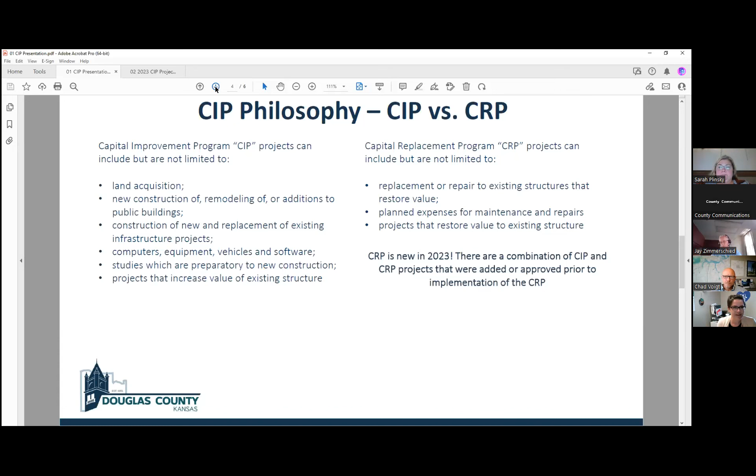As we were looking at the CIP this year, there were a couple of projects that we've had in the CIP for a couple of years, and at least for the past year, they've sat idle.

The Douglas County Correctional Facility Space Reallocation Project — that project we were able to determine was well outside of the scope of our capital improvement program. It looks like that project may cost upwards of around $18 million to complete.

So in the proposed CIP, you will see a redistribution of funds to both projects in the CIP and the CRP. That is one of the projects that has provided a significant influx of funding available for other projects should we reallocate that funding.

And Brooke, if I can interject there a little bit, Sheriff Armbruster is also available if there are questions later by the commission.

I think we haven't closed the loop on this conversation with the county commission yet in terms of the initial work the sheriff's office did with Treanor Architects to determine what some reuse of space would cost.

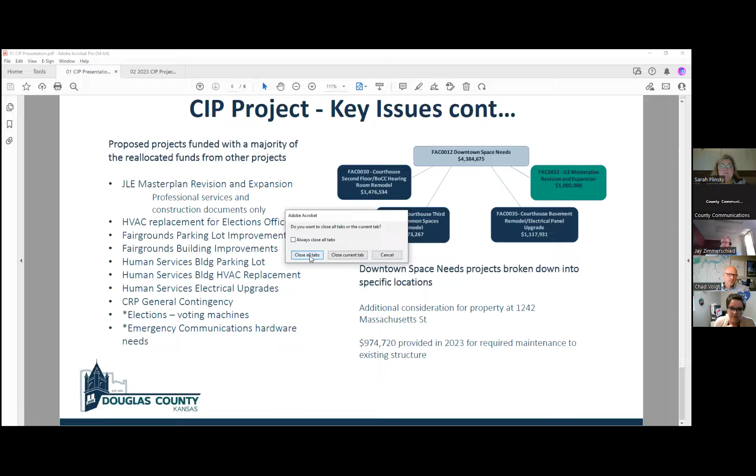If I may, I'm going to pull up the individual project pages and quickly walk the commission through them, being mindful of time since I want to share with our colleagues over at Public Works. Bear with me here. Sorry, guys, I closed it. Okay, almost there, thank you for your patience. All right, so this is very, very small.

I'm not going to get into the summary a whole lot, since everything on this page is on the individual project pages, so I'll just go through that. This table is an allocation summary by year of expected expenditures, and it shows all the project allocations by year, also including 2022, so we're also looking at what we did this year too. Let me make this a little bigger for everybody. Is that good? Okay.

This first project is a long running project, I think it started in 2017. This is our yearly payment on the bond issue for the fire station at 745 Kentucky Street - I may have gotten that address wrong - but we typically pay about $100,000 a year. As of 2022, approximately $1.04 million in debt remains as the county's portion, scheduled to be exhausted in 2033. That debt will be relieved and we can free up an additional $100,000 each year for that. There is no allocation in 2023.

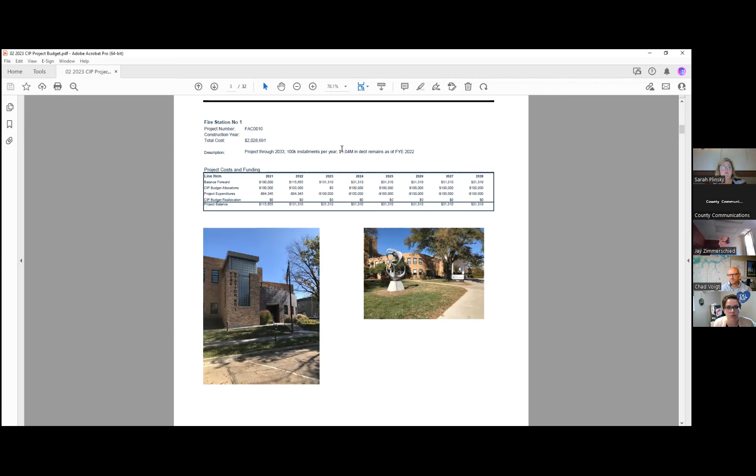That is because a few years back, there was an extra $100,000 on there, and just in case we were able to pay that off early, the thought was that we could just save that and set it aside, but we'll just have to keep paying the payments each year.

The next project, this is that reallocated project. I indicate here which projects they were reallocated to. We saw that in the chart that I broke down on the presentation slide.

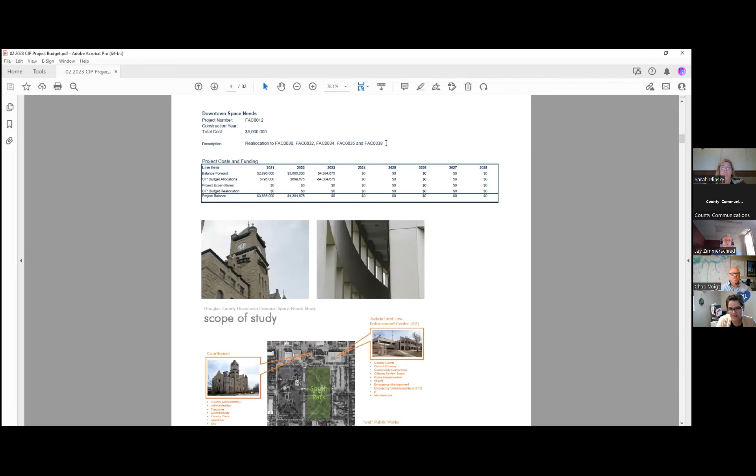And then the courthouse stonework restoration. This project is slated to be completed in 2023, so work has already begun. This is the basement waterproofing and also the above-grade restoration to the courthouse stonework. Once we really get that waterproofed on the exterior for the above grade, we can really focus in on getting some of the common spaces inside the courthouse and offices renovated, since we won't have water coming in.

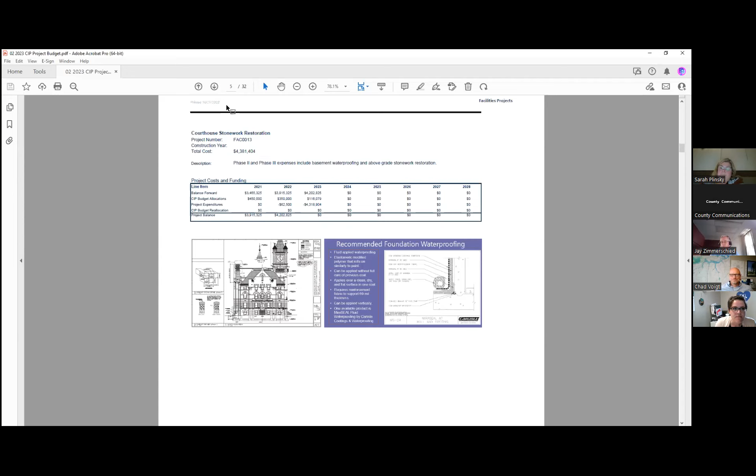The next project is the Fairgrounds Improvement Project. Maintenance staff has made significant headway on getting contractors out to the fairgrounds to make improvements to that property. They're just now completing the roofing project at the community building. That work is underway right now, and it should be complete in early 2023.

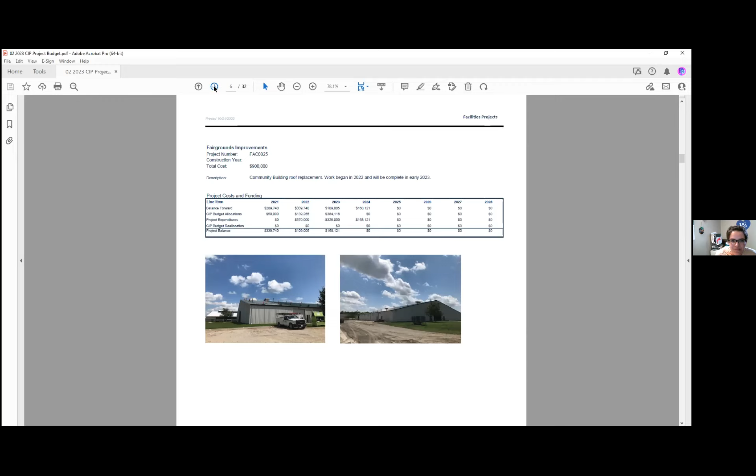The Douglas County Correctional Facility Space Reallocation Project - this is the project that we did, in fact, in the proposed CIP, reallocate to other CIP or CRP projects. I do want to note that in out years 2027 and 2028, the proposal is to put some additional money towards that so that we can start looking at that project again.

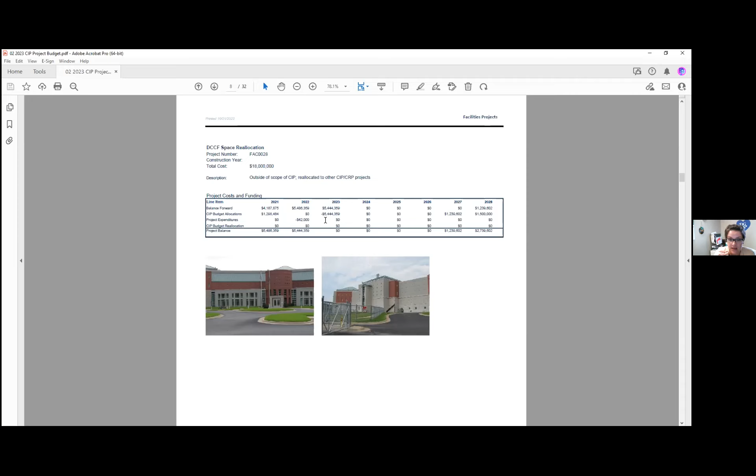The first floor clerk's office remodel, this project is slated to be completed by the end of the year. Originally, when we had looked at this project, it was split between an equipment reserve fund and the capital improvement fund. I just want to point out that in 2023, with the additional funding available through reallocation of funds from those other projects, I did include the other half to reimburse that equipment reserve fund in 2023. I just want to point that out because that is a little bit different than what was originally brought to the commission when we talked about this project.

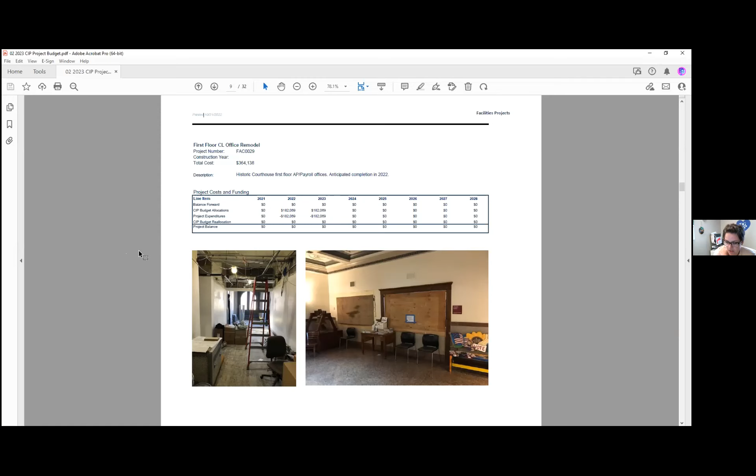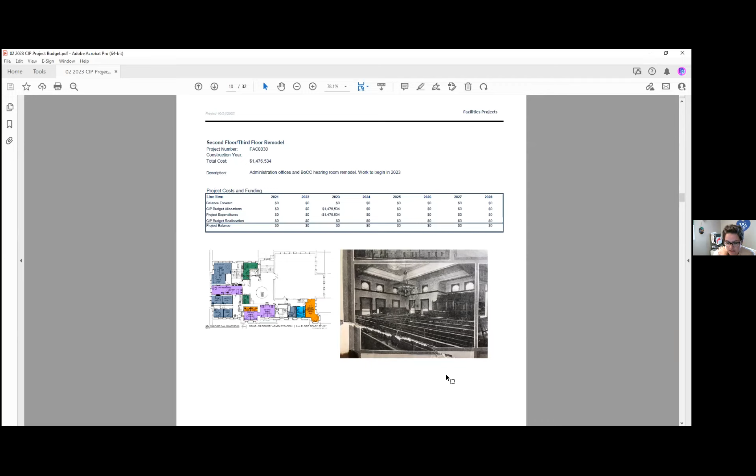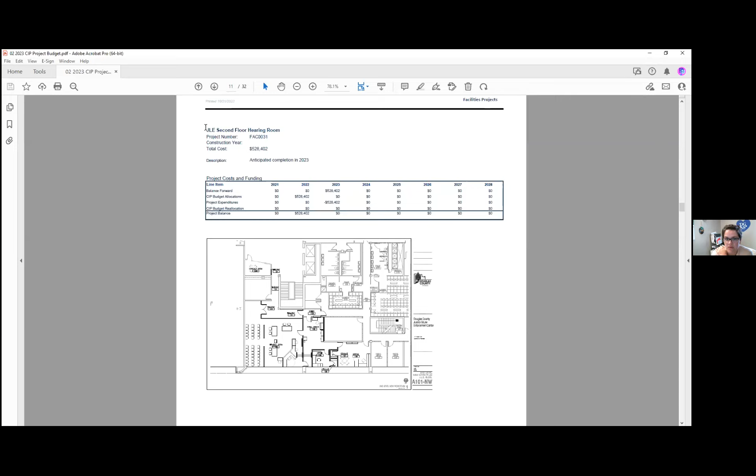And the second floor hearing room in the JLE, this is a project that was approved this year and work is getting ready to start. I don't know if we'll pay any out this year, so I put the remaining payout for that project next year.

JLE master plan revision and expansion. I'm not going to spend a whole lot of time here because I think I covered it pretty well in the presentation that we went over earlier. But if commission has any questions about that, I'd be happy to answer that.

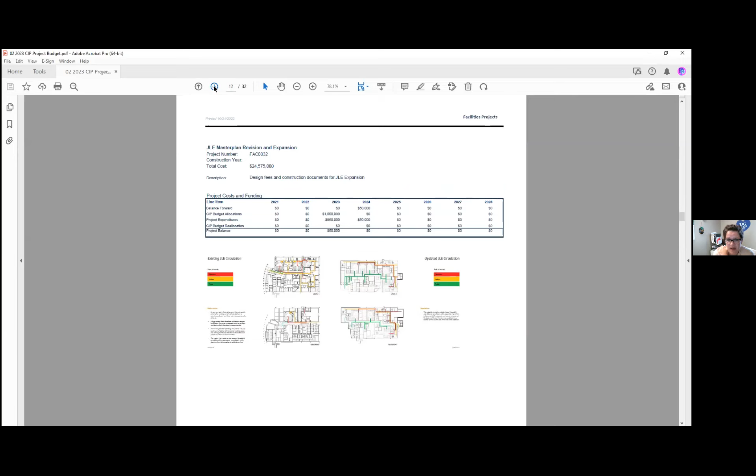Courthouse third floor remodel of the common spaces. This is going to be the Register of Deeds office and then just general common spaces, hallways, bathrooms, repairing some of the paint and plaster where water is coming in on the west side and the north side.

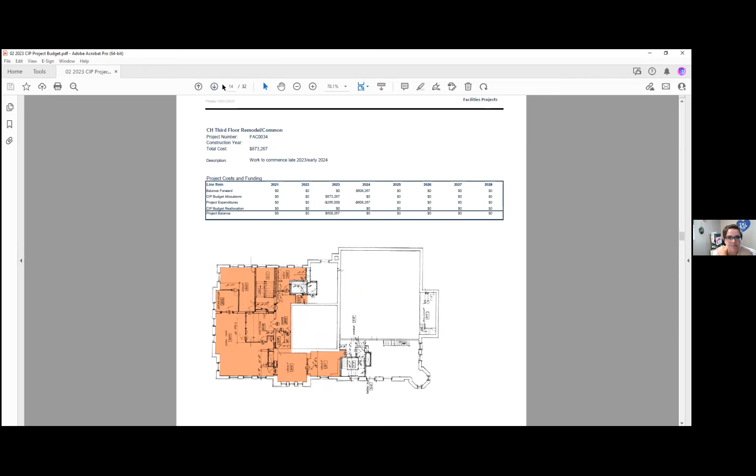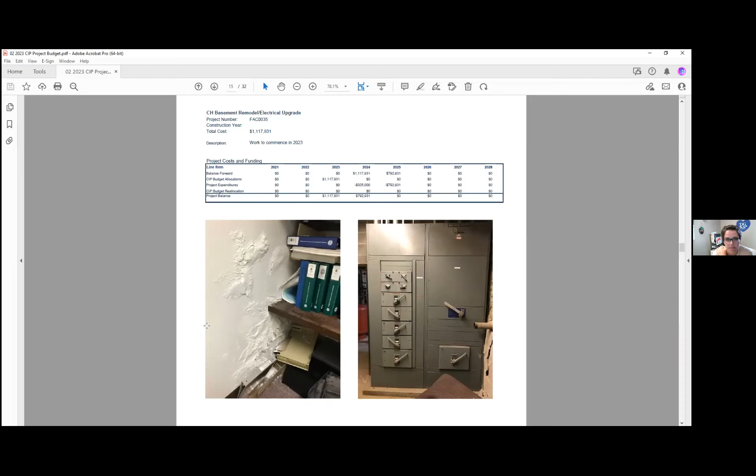Courthouse basement remodel and electrical upgrade. We talked a little bit about this, but again, looking at the walls downstairs, once we get that basement waterproofed, it is going to be really important to make sure that we get in there, repair those walls, paint them, and get them up to how they should be.

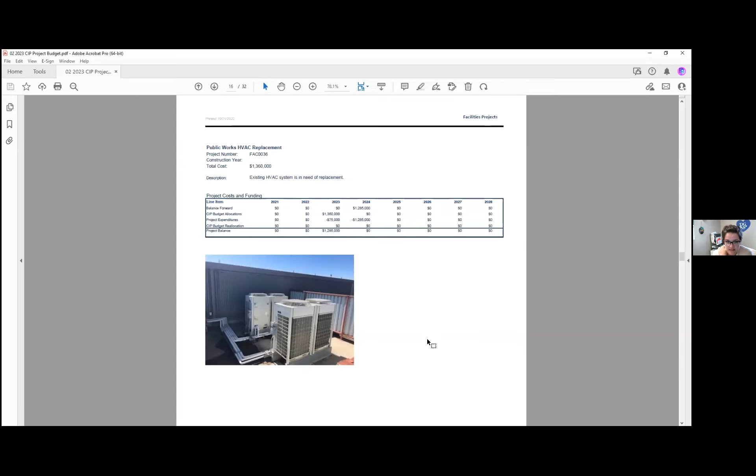Public Works HVAC replacement. This is a project that needs to be completed. I would defer to my colleagues that have a little more technical knowledge than I do if commission has specific questions about this project, but the existing HVAC system at Public Works is in need of replacement.

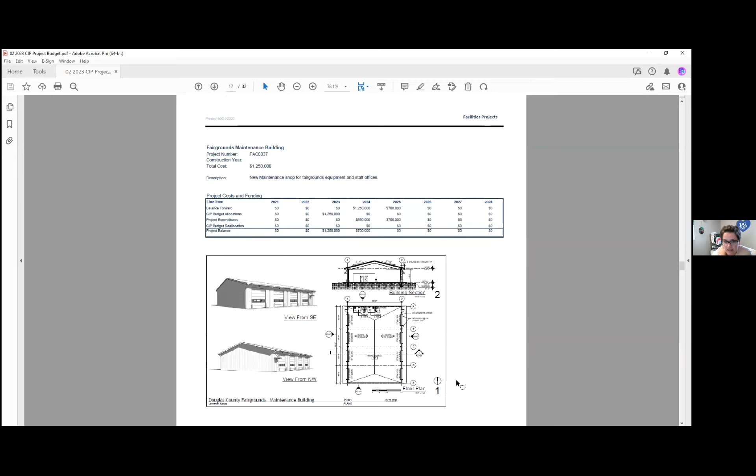Fairgrounds maintenance staff also needs a building, a new shop for the fairgrounds equipment and staff offices. The illustration depicts how that building would be set up, and these funds are allocated in 2023, with project beginning in 2024 and 2025 in the proposed CIP.

1242 Massachusetts improvements. I spoke a little about this already, so I won't spend a lot of time here. But this project could be ongoing for a number of years as we repair what needs repaired now, and then move forward into renovating that building for office space and making improvements at that location.

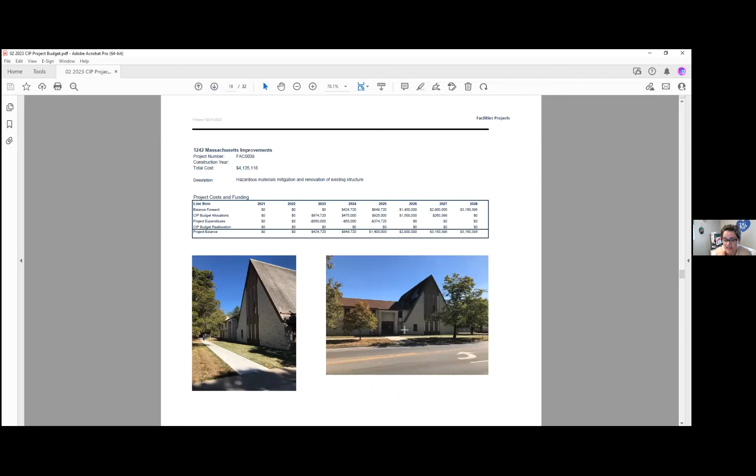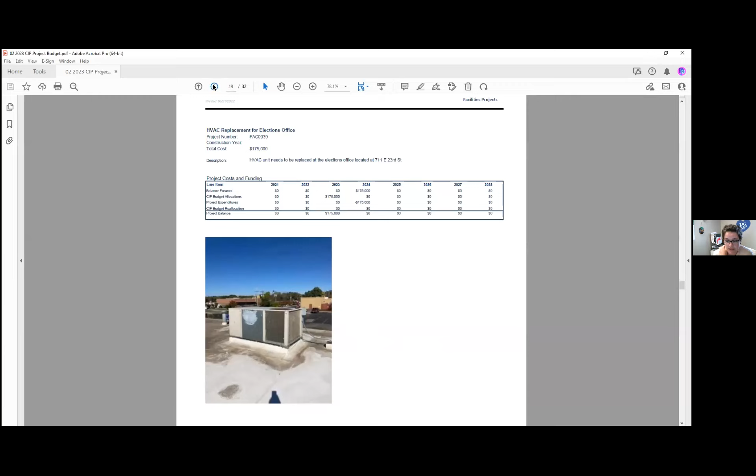HVAC replacement for the elections office. The HVAC unit does need to be replaced there. It's aged and it could potentially fail. I would defer to any of my colleagues that have more technical knowledge to answer questions.

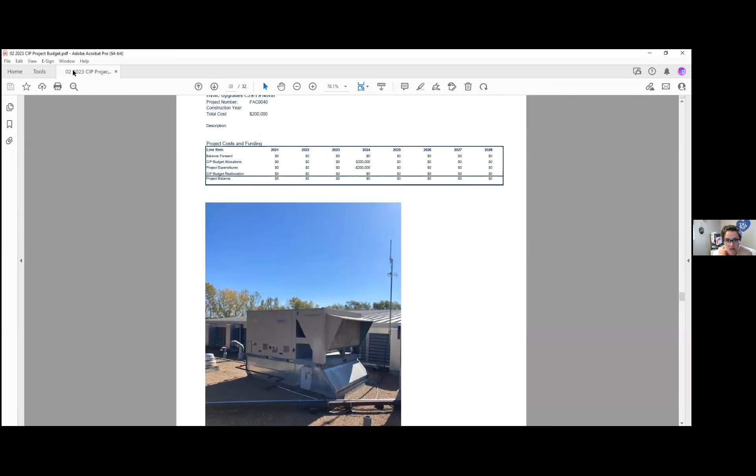HVAC upgrades to the youth services building. This is the building at 330 Northeast Industrial Lane. This project is slated for 2024 and is in need of upgrade.

HVAC upgrades to the JLE and historic courthouse. This project is slated for 2024.

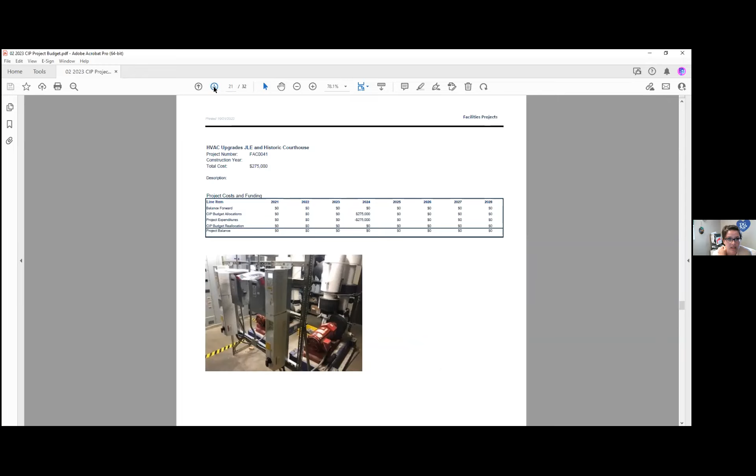General contingency is available for both CIP and CRP. These funds are available for things that come up throughout the year. I know we've had a couple of things this year, the elevator, the first floor remodel. We'd like to have sufficient funds available for projects that come up unanticipated, so we have funding to get things done quickly, should the need arise.

The fairgrounds parking lots are crumbling and need improvement. These projects are slated for 2024 and 2025, with allocations over 3 years beginning in 2023.

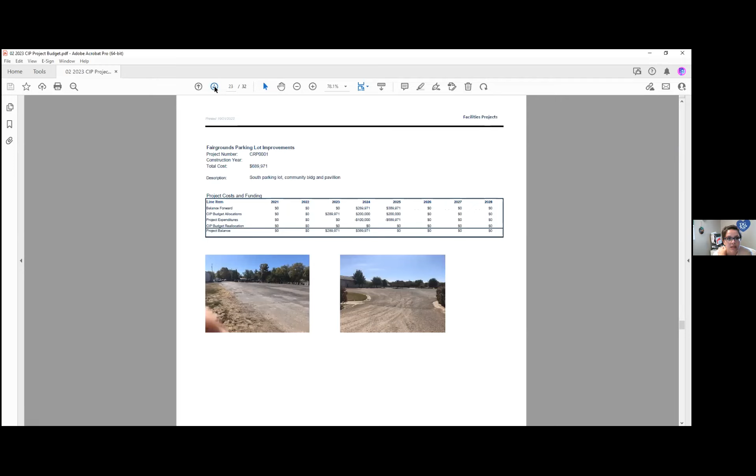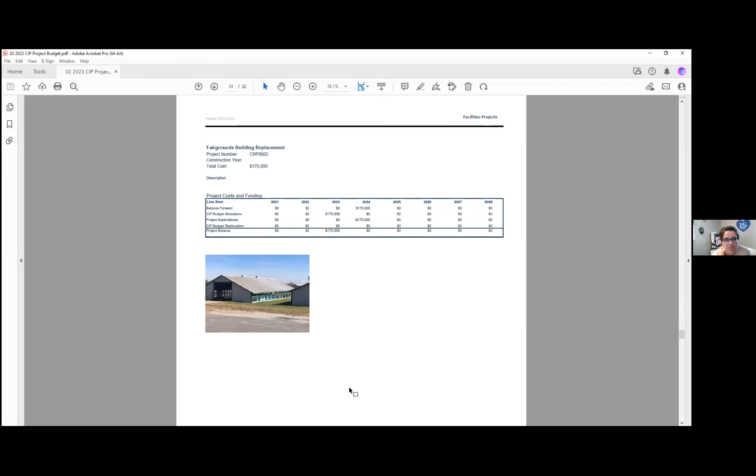Fairgrounds building replacement. This is slated for work to begin in 2024.

The Human Services building HVAC also is in need of replacement. The project is allocated in 2023, but I have it set to be completed in 2025.

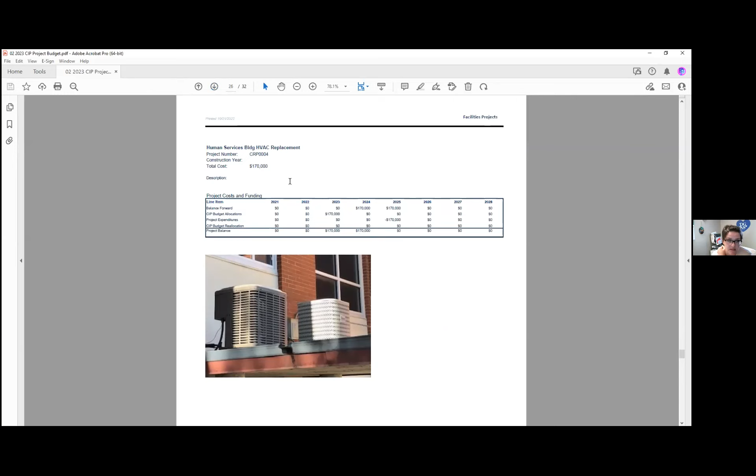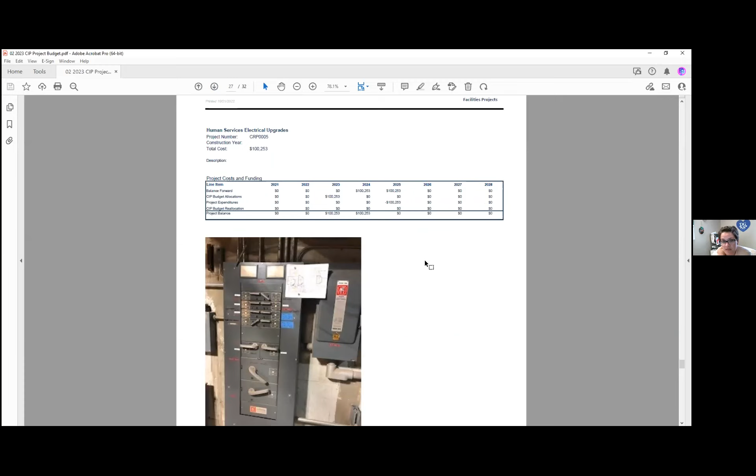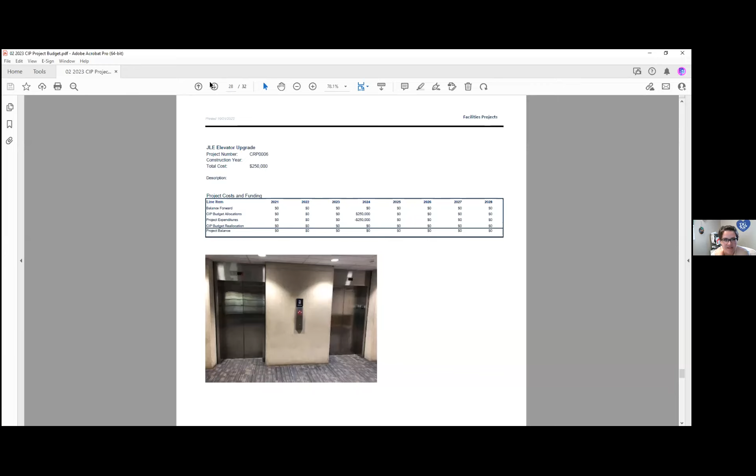The Justice and Law Enforcement Center is in need of an elevator upgrade. Similarly to the courthouse, it's aging, and we just want to get a leg up on that before any failure.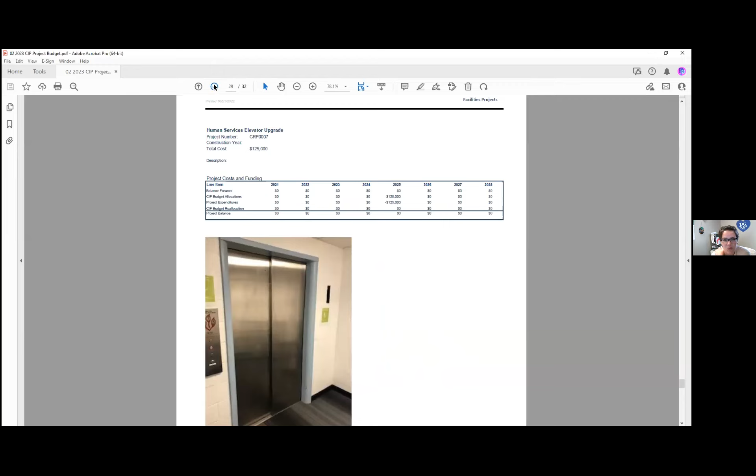We want to get this down now as a project that needs to be done. And then we have an HVAC replacement at the Fairgrounds Building 21 project, allocated and slated to begin in 2024.

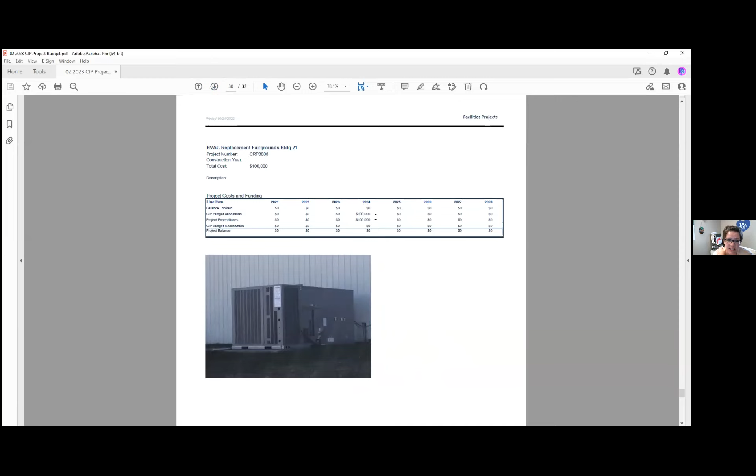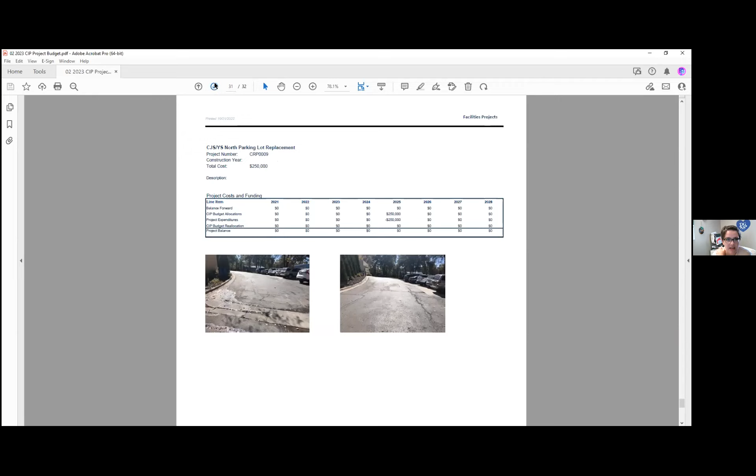Going back to youth services north, the parking lot is in need of replacement there. That project is allocated and slated for 2025.

Finally, like the capital improvement program allocation, there's also a contingency allocation for the capital repair program. This is vital. When a need arises, we have funding available as we approach commission about those issues that come up throughout the year that we haven't planned for.

That is all I have as the facilities side of the presentation. Chad, I'm right at 4:29. So if commissioners have any questions, I'd be happy to answer them now or at the end if Chad wants to begin too. It's up to you guys.

Why don't we pause for questions here on these first set of projects? I have a couple questions, but I want to open it up to Commissioner Willey first.

Well, you may have noticed I had some technical difficulties. I've been here the whole time, just maybe not visually. I've swapped to another computer from IT. I do have quite a few questions actually, and I had been looking for a time to sit down with Brooke to explore some of those in more depth, which I think would not be within this meeting, but more of a one-on-one, and give us a little time before we have this to vote on.

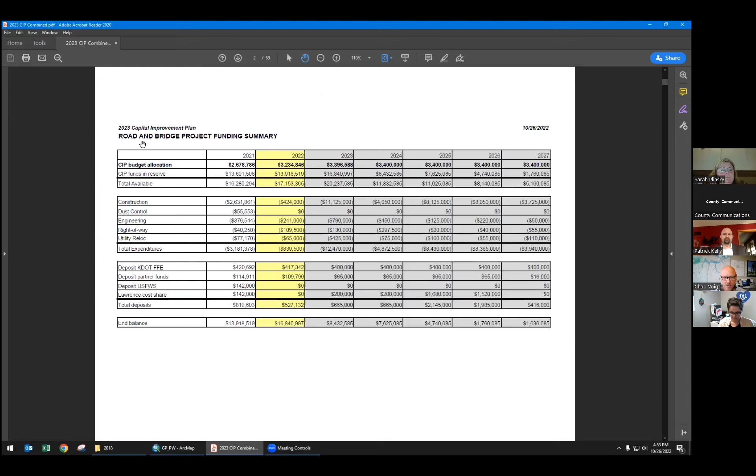This is our part of the capital improvement plan. This document will be the one that comes to you in the packet when we do go for approval of the CIP. So this is a complete and ready to go recommendation from us. This table here, I'm not going to cover. It's a format we've always done in the years I've been here, so I wanted to include that just as a point of reference. It's our cash flow and expenditures kind of in a big snapshot.

There's a benefit to being able to do this. We can respond to things like this year, when we had to reject bids and push projects back just based on the economy and the way things are panning out.

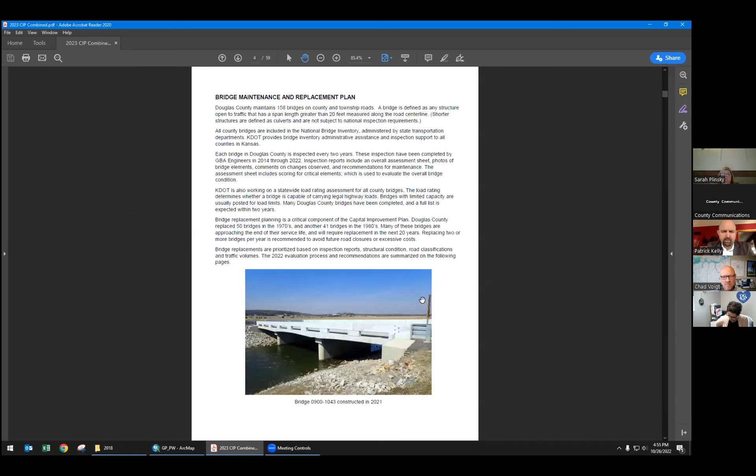I broke the CIP this year into two pieces, road and bridge, and I started with bridge. This is our bridge maintenance and replacement plan portion. I've got some narrative here you can refer back to—the basics of information about our system and how we prioritize projects.

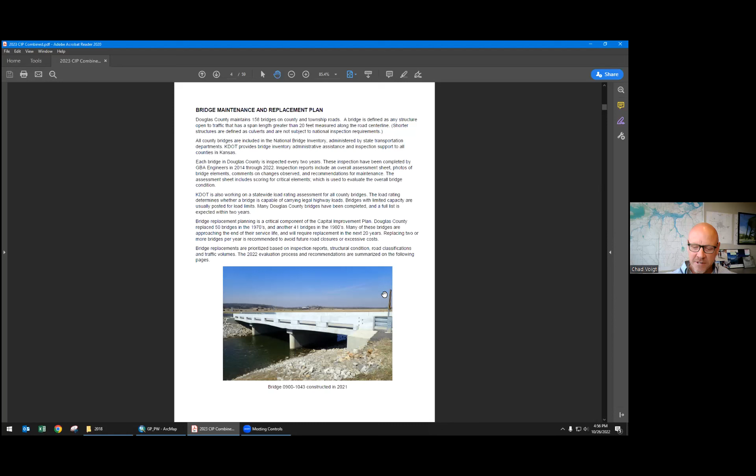I wanted to jump right into this. This is something we're putting together this year for the first time, where we're doing our own internal scoring. The reason is that the national standards have changed how they score bridge inspections, and the numbers we use to prioritize projects shifted out from under our feet a little bit—bridges we thought we might be replacing in 5 years, suddenly maybe we shouldn't. So we dug into the details and came up with our own format for this.

It's got more emphasis in one area: making sure that our major routes that are emergency service routes get bridges first—if you're going to lose that bridge in 10 years, let's get it replaced. We want to keep that level of route open as a first priority. Then there are the connecting routes, a second priority, and then all local roads are the next priority. We've got a lot of bridges on township rock roads that carry 50 vehicles a day. We want to keep those bridges in good shape, but they're clearly not as high a priority.

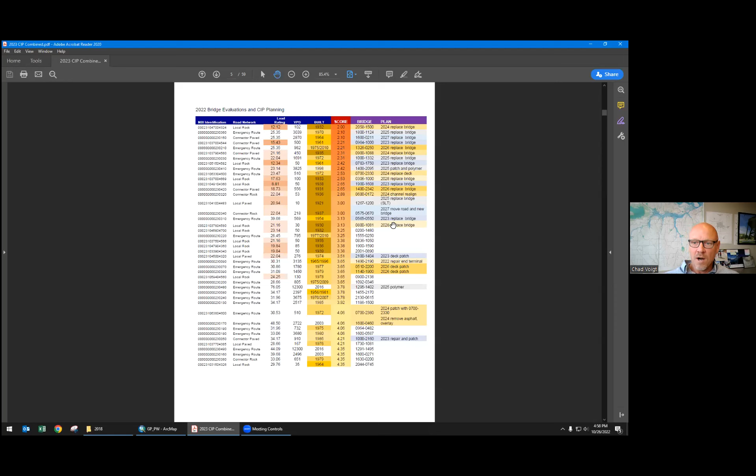It's already in our design process, and we want to put out a bid next year for construction the following year. As you go down through, you can see, based on the scoring and the information that led to that scoring, then the bridge numbers, and then our replacement plans. That's a full disclosure on how we got to why we're working on certain bridges. Go down through all those pages, and you get to the bottom—this is our full list for the 2023 CIP for bridge replacements for the years ahead.

Moving on to the other piece of our CIP, road improvement projects. I've restated some goals we've shared in the past, and hit on highlights of our major road projects—a narrative of why they're on the list, where they came from, and when we anticipate getting the work done. After that, another list of the remaining projects in our CIP—these are the road projects, and that completes all of the work we intend to do.

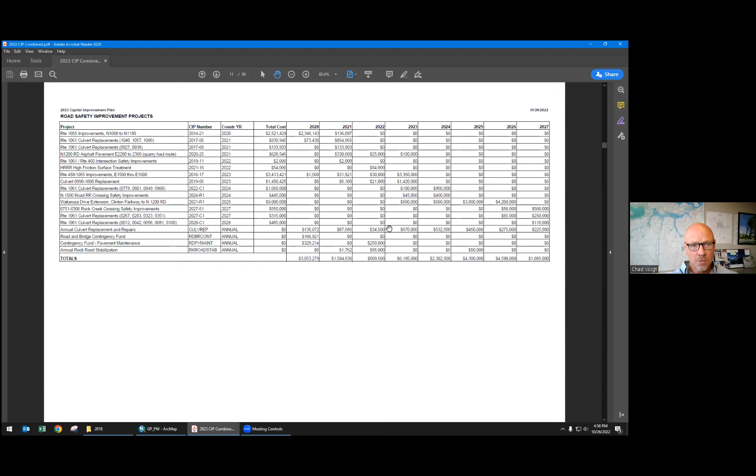And then, as we've done in the past, we generated a detailed project list, similar to the one that Brooke shared. That's in the document too.

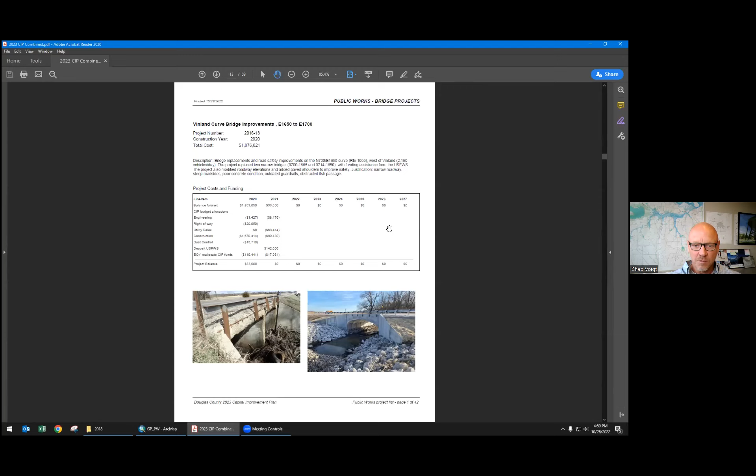We roll right down through the projects, starting with completed projects, looking back at what we've accomplished. This is Vinland Curve, 2 bridges that were replaced. Both were very similar, and the new bridges are precast concrete arch, which we're really pleased with. So we're happy with that project.

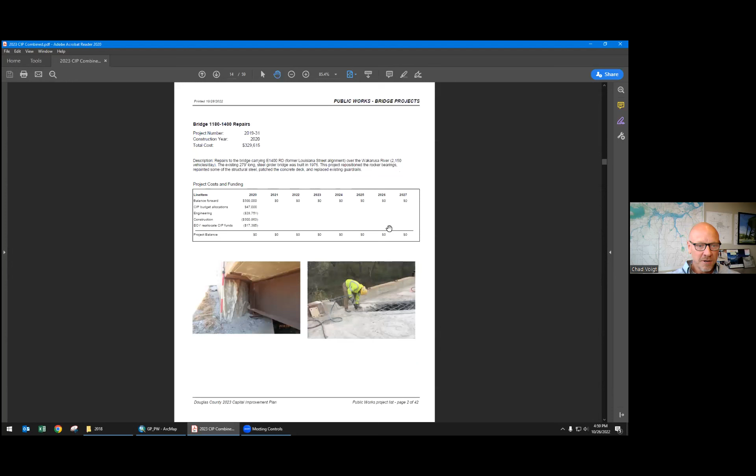Bridge maintenance projects that we've done. This is the Wakarusa River Bridge project that we completed last year. This is another bridge that we're proud of.

This was actually a culvert before, and it was undersized, so it was scouring really badly, and the yellow jackets down in the hole there, Keith is one of those. We were down there inspecting the footings, and that structure was being undermined by the high flows that were occurring. So a wider bridge was necessary. We went in that case from a culvert to a bridge.

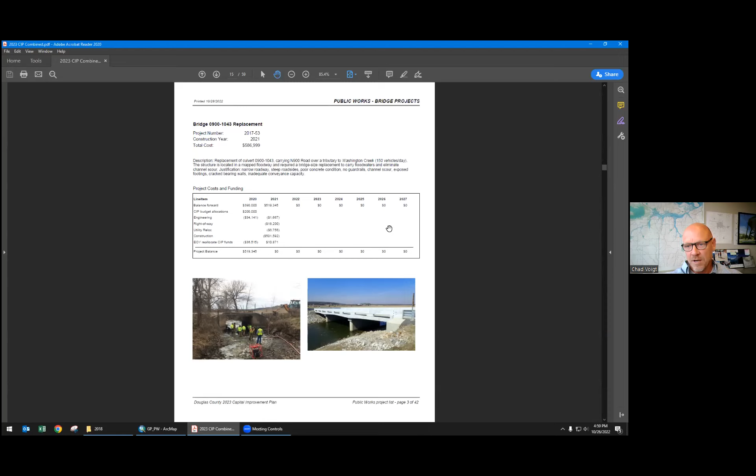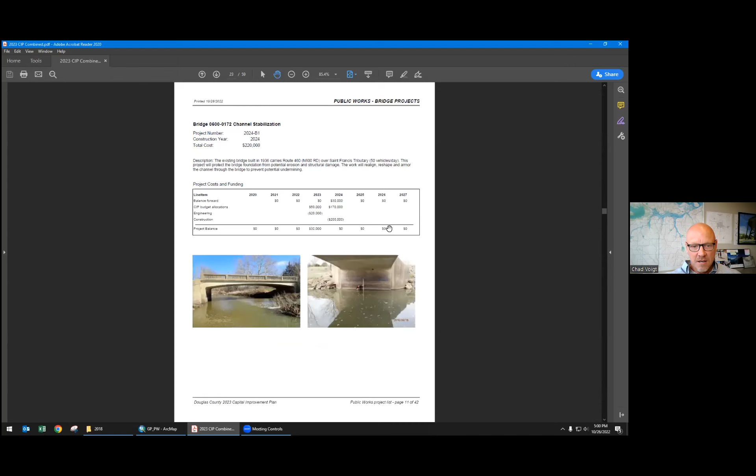So you may notice that last year we had 157 bridges. Now we have 158. This is our new bridge. You can, on your own time, look through several more of these, and I'm going to roll right down through the bridges. You can see that bridges are a big portion of what we focus on. If we lose a bridge, we have to close the road. Those are a huge investment, and there's obviously a huge safety concern with those.

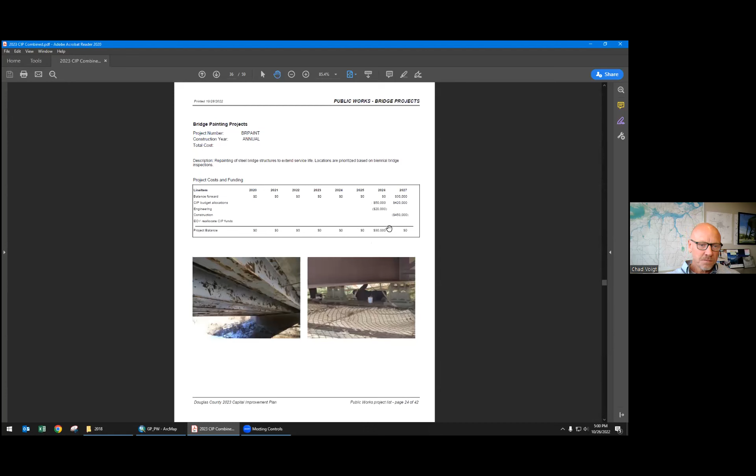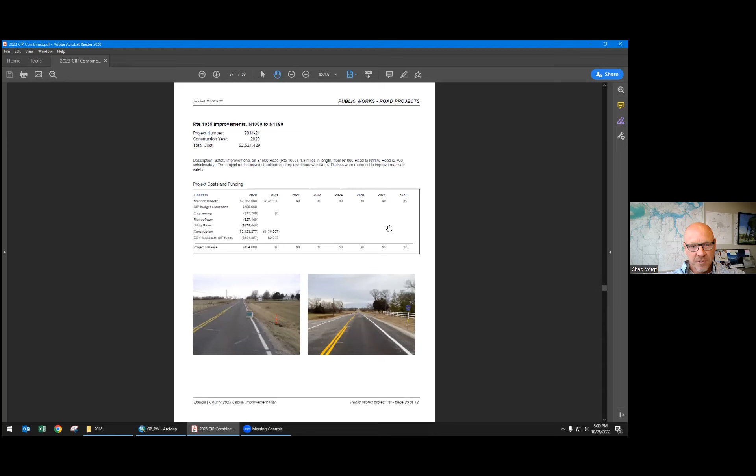All right, now I've gotten into road projects. This is Haskell Extended South, and this is another project that was completed. In all of these summary sheets, you can see the accounting, the total costs, when they were completed, and then obviously a couple of pictures.

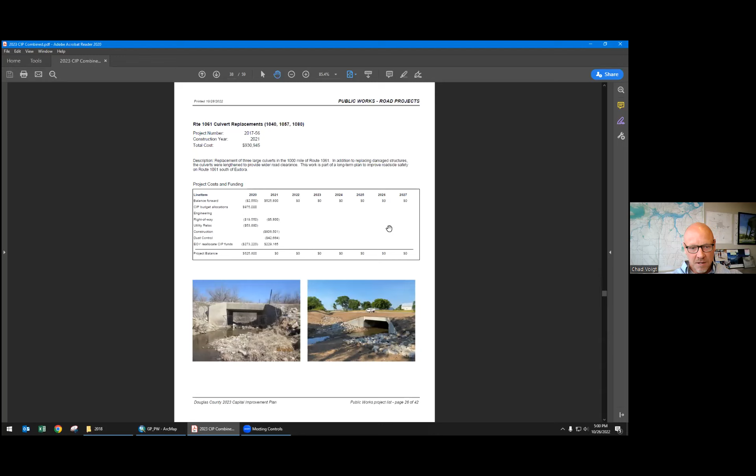I've included culvert replacements on the roadside just to distinguish that they're not bridges. They tend to be more road safety oriented. In this case, you can see a culvert got replaced and we've got much more clearance on the side of the road, and that's really the main point there.

I'm going to let you folks look through this when there's more time available, but right here, this is our next project in terms of schedule to get it done. We just opened bids yesterday on this, and we were really pleased with those. The estimate was $3.5 million. It came in at $3 million, and we had bids at 3.2, 3.3, and 3.6. So competitive, in the ballpark of what we expected, and a good bid. So that's good news. We'll put that on the agenda for approval for next week to award that contract.

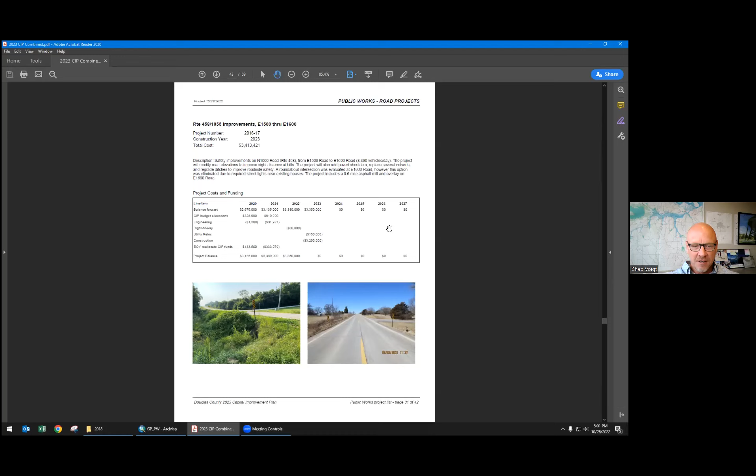And then we'll be rolling. So that's part of the $7 million that I referenced that we've already got online for next year. This project, by the way, is Route 458, which is N1000 road between E1500 and E1600. It's where the fire was the other day.

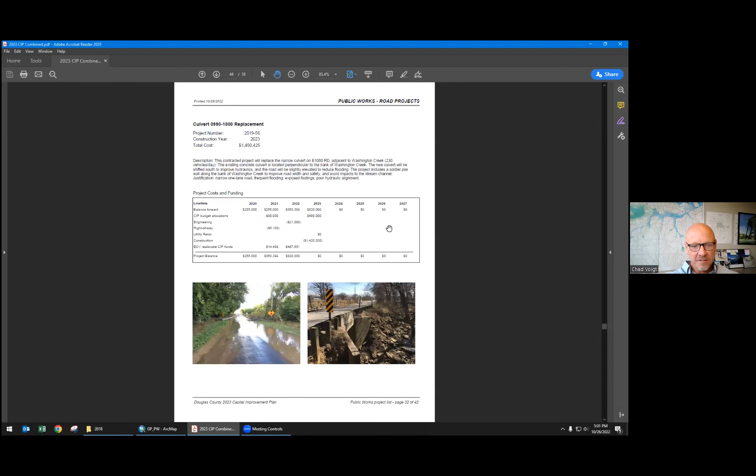A large culvert replacement project we got included in there. You've seen this in the past. Obviously the Wakarusa project is in there too, and we're still showing city participation in this. We will need to cover that issue.

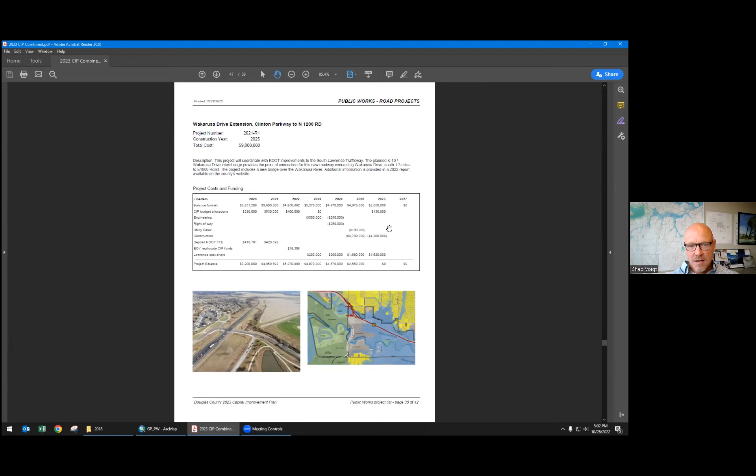If the city decides they do not want to participate in the road construction part of this, then the answer to that question is that we would probably take the bridge replacement schedule, insert one off year, and basically have a bye year and push back 1 year. We're doing about 2 or 3 bridge replacements a year in this plan, so by delaying 2, we basically cover the gap on funding. So if that's necessary, then that's the approach that we would recommend.

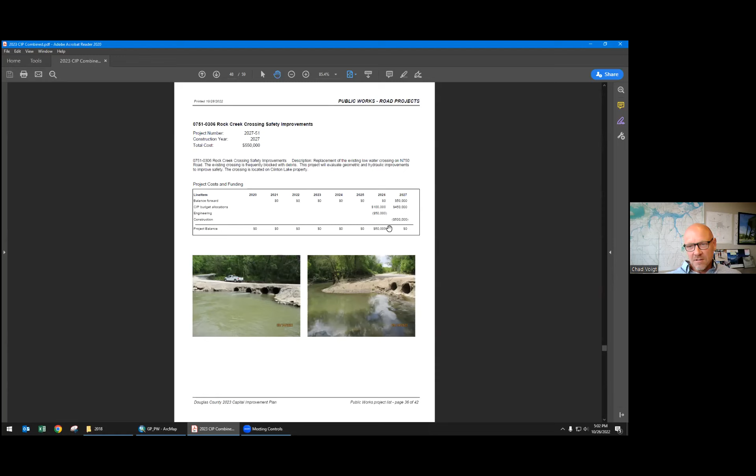We've got some low water crossings in the county that have kind of been sat just like this for many, many years. And the thing that is a concern to me is that as we improve these other roads, driver expectations are shifting. When you have younger drivers that have seen mostly roads with shoulders and a lot of signage and a lot of safe conditions, they're not like we were when we were kids, and they're coming up on something like this, and they may be a lot more surprised than we were. So with that in mind, we want to start addressing some of these low water crossings and improving them, making them more safe.

More culvert replacements. This is on Route 1061, where we intend to do some major improvements over many years. That's probably our heaviest traveled route that hasn't had improvements, so we've already begun and will continue focusing on Route 1061. The development pressure coming around Eudora is only going to make that more of a priority.

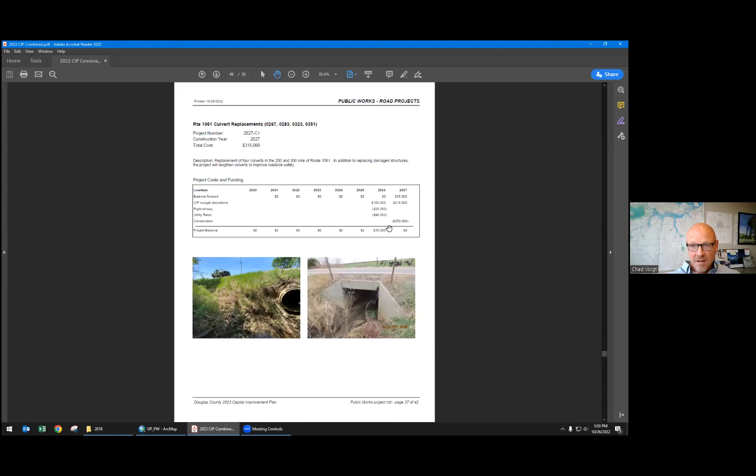More 1061 culverts, this one actually way south down at the county line. We still have funding in there for annual projects - this is annual culvert replacements. Those are county crews in the pictures, and that's been a great source of continual funding for a lot of different smaller projects, giving us flexibility to push bids around for materials and cover those gaps.

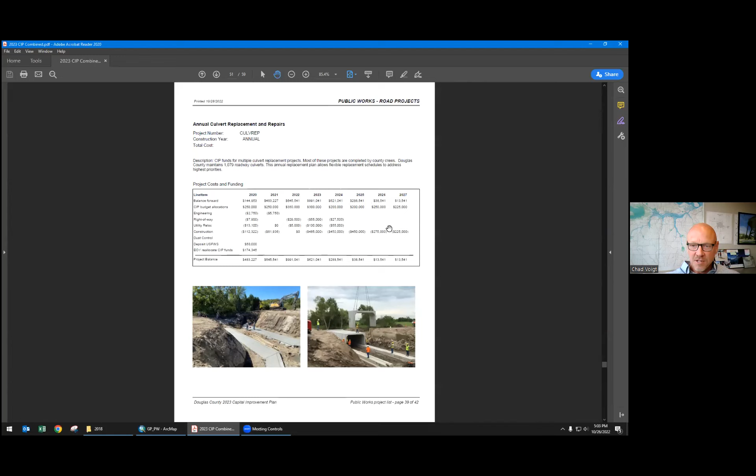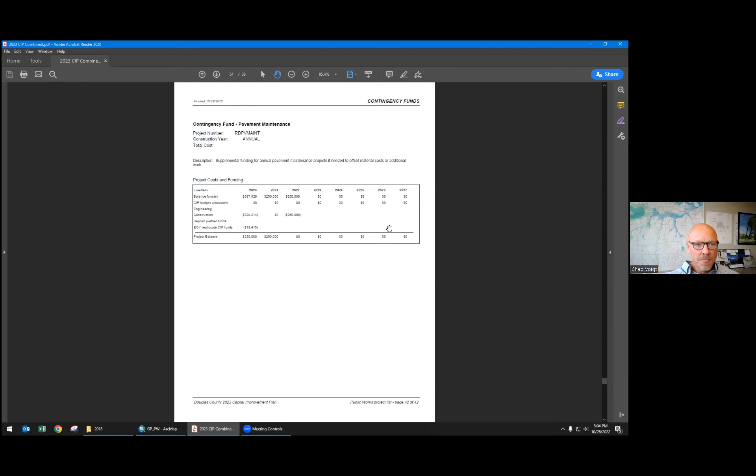Annual rock road stabilization has been an ongoing thing, not a lot of dollars there. And then a couple of contingency funds that you've seen in the past. So that's the end of the detailed project list.

I also put in here this output that I've got. By the way, this is all in a database, so we can crunch the numbers a lot of different ways and produce summary tables. In this case, this is the CIP project schedule by construction cost, looking just at the cost of construction for each year, totaling it up.

The reason I initially did this was to start thinking about our inspection load. We do a lot of inspection in-house on these projects, and if we've got $12 million next year, we were very concerned about how we're going to cover that. But you can see when you get down to 2022, it's 304,000 - we haven't done much this year, so we've been doing other things to make up and use that time. Next year we've got 10.6 million in actual construction that we're going to try to cover.

So that information is all available in the packet, and we can talk about details. It's available publicly. We've got our biennial bridge inspection report that we received from a consulting engineer that we could share with folks if they're interested. So that's where we stand on things.

Thank you, Chad. I really appreciate this report, it's just great. And same thing, Brooke, and your group. I love having the pictures so the public can visualize what we're talking about, especially the parking lots - it's great to see pictures, that really helps, and that each project is isolated and shows where it is in the system. Really appreciate all the county's work.